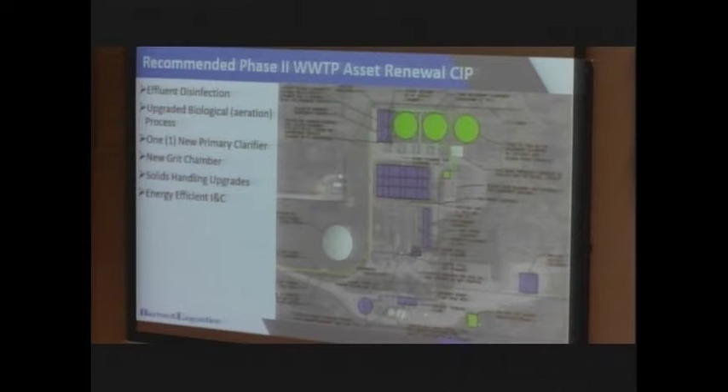When we talk about energy efficiency, aeration drives a lot of this. The plant somewhat operates blind. There's a lot of new technologies and new innovations regarding how to make a biological system more energy efficient.

Sorry, I got to talk and drive here.

So just to mention real quick, with respect to the asset renewal and the opportunities for the aeration process, these are the aeration tanks. These are kind of sketched as what the current concept would be. Currently, there are 3 basins, and unfortunately, I can't point to this. One of the challenges with the facility is simply footprint. There's not a lot of area to develop.

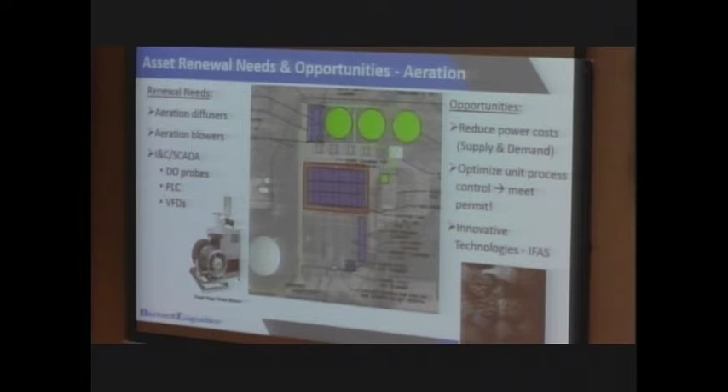So the process we have is really focused on providing more conservation of space. It's called a fixed film process. The specific process we looked at was an integrated fixed film activated sludge process. So essentially we take the same tank, we reconfigure the plumbing, and we add media in there, essentially increasing the surface area to enhance the biological efficiency of the process.

Along with that, the biological process runs on blowers. Those blowers are pushing air through a lot of diffusers in the bottom. I think they run continuously right now. A modern facility will monitor oxygen levels and ramp the speed of the blowers up and down, and new blowers will come on. So there are additional controls that in and of themselves will provide some significant enhancements to energy efficiency.

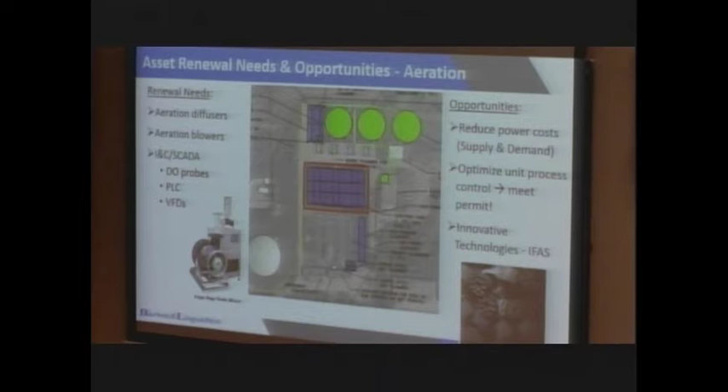The second part of this, the crux of this, and I think this is really what's driving a lot of these discussions, is the solids handling. We did the Phase 1 project with the need that clarifiers had failed. The town was really limping along with about 1.5 clarifiers. And since Art's been involved, and certainly since Rick's been involved, there's been an identified need, reflected in the original PER, that the solids handling facilities are deficient.

Our findings indicated that right now there's not enough capacity just to digest the solids, but there are also safety issues. There are issues with the digester covers, so a lot of methane is currently being leaked to the atmosphere. The gas flare that's required to control that gas is not currently code compliant. It sits on top of the building. So there's a lot of issues with respect to code compliance, safety, and overall efficiency of the system.

The other piece of this is that the digestion process, by not being as efficient, ends up generating more solids than you need to. The end result is there's more tonnage leaving the site, and there's a tipping fee issue with that. So a more efficient digestion or solids management process ultimately leads to reduced volume, reduced percent solids, and reduced tonnage that requires landfilling. I mentioned the environmental safety benefits.

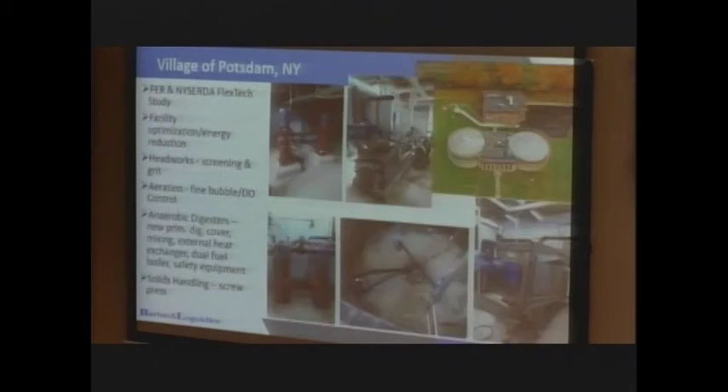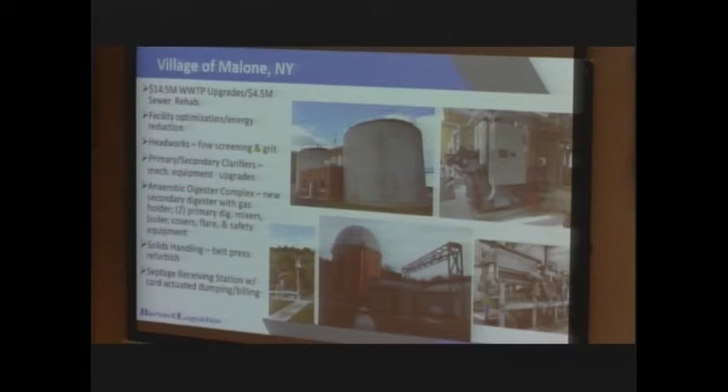Couple things too, you see a belt filter press here. Currently, you have a centrifuge and an older press. You're going to see some different technologies here. Again, these are things that we would look at as alternatives, similar to a PER. And then also with septage receiving, you can run the gamut from just dumping into a manhole with a screen, or in this case, we put in card actuated dumping where you can keep track; every hauler gets a card and it bills them that way.

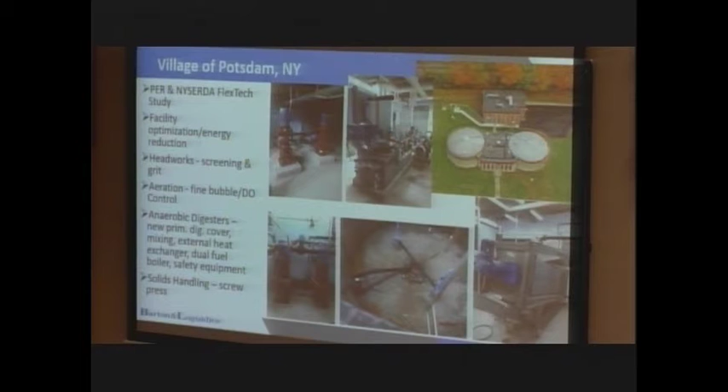So again, in the village of Potsdam, 2 anaerobic digesters, very similar configuration to what you have here in the town. We came in and basically revamped all of the gas handling and safety equipment, the covers, the pumps, sludge heating. Sludge mixing is critical for efficiency in maintaining temperature in your anaerobic digesters.

Ken, what is that bottom picture? What are we looking at? This here? Yep. So again, you take these covers off. Typically you're going to have a concrete structure that needs refurbishing, and everything's got to be clean. Once you do that, what we did here is put in this piping system with directional valves, and this takes liquid sludge and pumps it into the digester in different directions to get a nice optimal mix at full depth.

Right now, what's your mixing system consist of? When it was built, bubble, or cannon, sorry. Cannon, the bubble gun, yeah. This is one of the typical ones that we use, versus another option, a roof-mounted mixer, which George can cover. And in this case, that's a screw press, a recent technology that we've been using at some of the smaller plants.

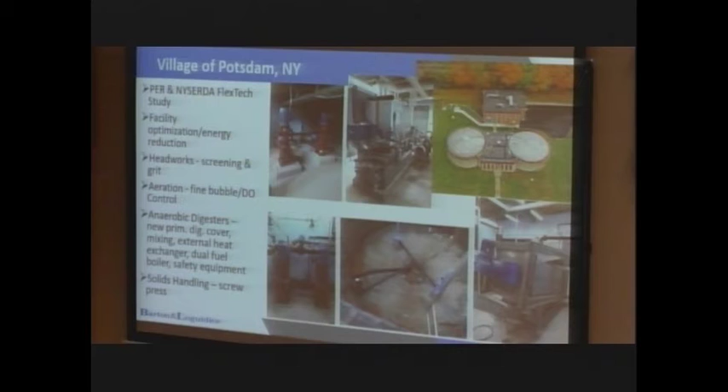So of the 6 examples we're showing you, Ken has gone over the first 2 because he's been more involved in those, but I've had involvement on both of those facilities as well, in concept and a lot of the startup issues. But I really cut my teeth in the anaerobic digestion world by managing the Gloversville-Johnstown wastewater plant for over 15 years, about 3 hours to the east of you.

When you talk about the term WRRF, Gloversville-Johnstown tried to become one of the first WRRFs in New York State. Everybody can get to that term, but everybody doesn't have to do it the same way. For Gloversville, it was about expanding anaerobic digestion capacity because of industry in the area. A lot of dairy waste is there because of the Fage and Euphrates Cheese Company, and that waste is converted in the anaerobic digestion.

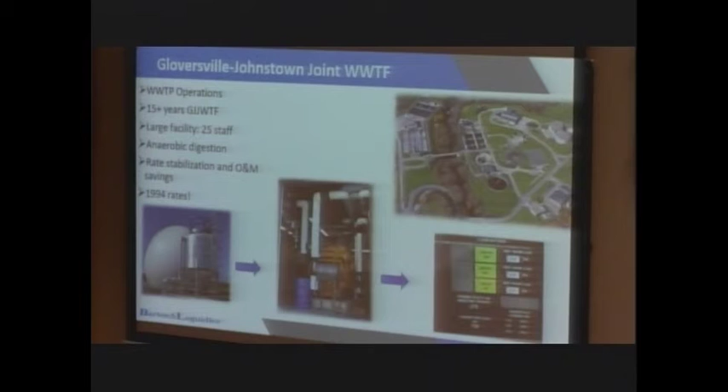There's someone in this room who spent a lot of time at Rome. He's your current operator. He embarked on a project to take old digester technology that was in disrepair, and a project we are in construction right now on is taking a digester. The bottom left picture is a 70-year-old anaerobic digester that was in very bad shape. The good news is the concrete was good. It needed covers, it needed a mixing system. That's the pumped mixing system like Ken was showing you from Malone, from Potsdam, being installed, a similar one. That technology is being used on one of their digesters.

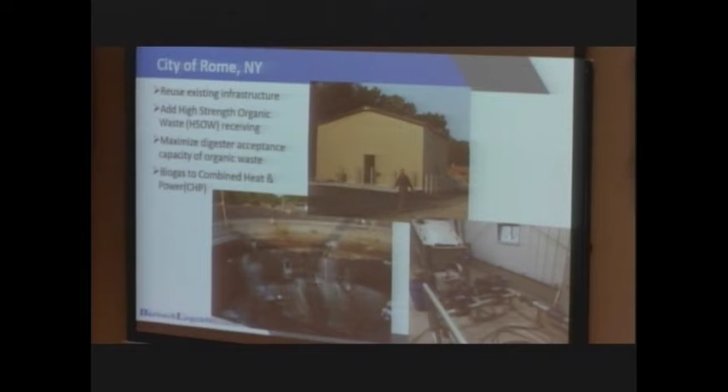They're going with some other technology called linear motion mixer, some of the new cutting edge stuff that's out there, for one of their other digesters. So existing tanks being reconstructed as part of this project. They have screening equipment to screen waste, organic waste, to get debris out of it before the waste goes into the digester. And that building up there is so they can accept some tankers. As trucks bring the organic waste, it can be screened prior to going to the digesters. So this project has been a lot about creating additional revenue, but also improving the only part of the plant that wasn't improved, and that was the solids handling systems and the anaerobic digesters.

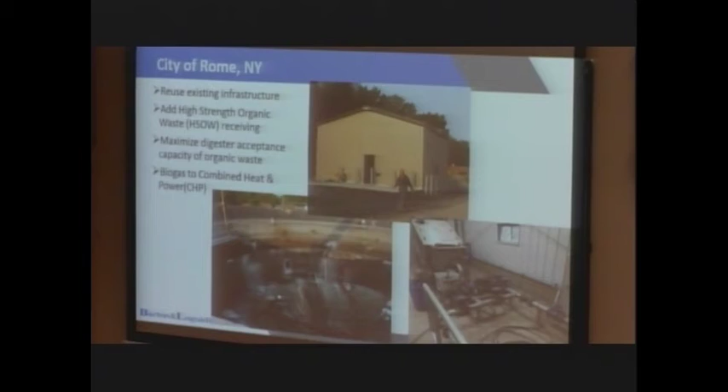Yes, sir. I noticed in a lot of your presentation, I see belt presses. Webster changed to a centrifuge about 15, 16 years ago, and used the belt press as a backup in case of breakdown. Is belt press the way to go now? It could be. Their centrifuge is a wonderful tool. Belt press is a wonderful tool. You have those choices. The facility I ran made a conscious effort to stay belt press because the maintenance staff could maintain it. They felt comfortable with it. They had been maintaining the bearings and belts. What's great about belt presses is they run very, very slow RPMs. The bearings turn very slowly, so they tend to have less maintenance on them. And most people who have socket wrenches and torches can put a new bearing on or put a new belt on.

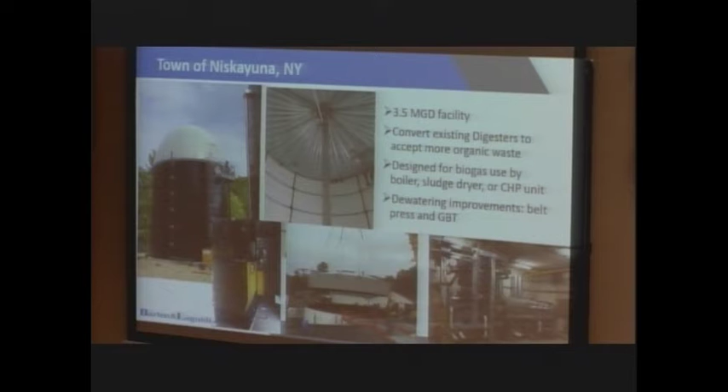The centrifuges, from when I was running a centrifuge in Rochester Northwest Quadrant plant back in the 70s, were original centrifuges, relatively slow. These new ones are extremely fast RPMs, and I'm sure Art would agree, it's not something that can be maintained easily by our standard maintenance staff. It needs specialty people. So it depends what's important to you. Secondly, the centrifuge actually produces a very good cake product, but it's using a lot more energy to do that. So if kilowatts are important to you, because let's just say you're spending 15 cents a kilowatt hour, maybe the belt press would be better. So it depends on your situation. Tipping fees, electricity costs, all those things go into it. So I think you have an option. Obviously, you know both technologies. Either can work. It's really a local decision. Okay, thank you.

No, you're fine. So we move on to a much larger project. And it's interesting. This is Altoona, Pennsylvania. This is under construction right now. The picture on the left, there's some brand new digesters being built. This is a community that never had an anaerobic digester. They're getting into the anaerobic digestion business because they want to make a solids product that eventually becomes for beneficial use and gets back onto the crop land. So to do that, they wanted to stabilize their sludges through anaerobic digestion, and then they want to put those sludges through a sludge dryer.

Because in Pennsylvania, similar to some of the problems we're having here locally, there's getting bans on how much sludges and cakes can go to the local landfill. What used to be a rule in Pennsylvania was if you were a landfill operator, 10% of what comes across the scale could be sludges and cakes from them bringing it to them. Because of some operational problems at landfills in Pennsylvania, they've changed the rule to 5%, and now everybody's scrambling. Where do you go? And fees have risen.

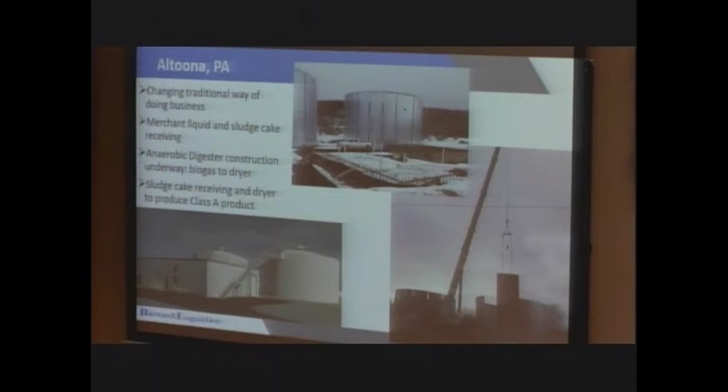When you're all done, that cake, instead of having 80% water in it, or 75% water, depending how good you do, it's going to have 5% water, 95% solids, so only a few truckloads are going out either for disposal or for beneficial use to a farm. So that kind of runs the gamut, and what you see there in the discussion on the presses for the sludge. Minimally, we're going to look at 3 different types of presses, which are going to be driven again by what the preference is and the staffing capabilities are.

So with this, I'm sure you don't want to hear you got to do another study, but you have to do another study. But it's going to take a different look at this, and it's got a different spin on it. And as I mentioned, as a NYSERDA FlexTech consultant, we have the ability to bring these projects to NYSERDA, wherein they will fund a portion of the study cost, which I'll get into. We became a FlexTech consultant based on our qualifications, and minimally we need to bring three projects a year, I believe. It starts as a planning grant, and ultimately what you're doing is developing a PER with a capital improvement plan that could ultimately leverage implementation money through NYSERDA as well.

As I said, it's consistent with what's been done already with the EFC, DEC compliant PER. So we're going to leverage as much of that as we can, especially on the process evaluation side. But again, we're going to take a deeper dive into the alternatives, power use, life cycle costs, and compare all those to come up with an ultimate recommendation based on your preferences on equipment. So yeah, that pretty much covers that.